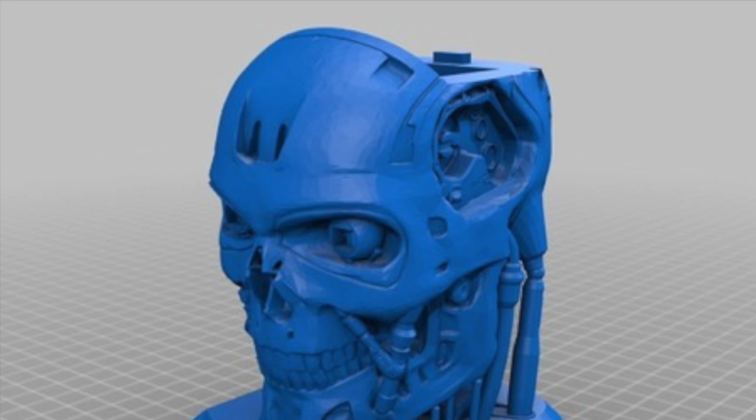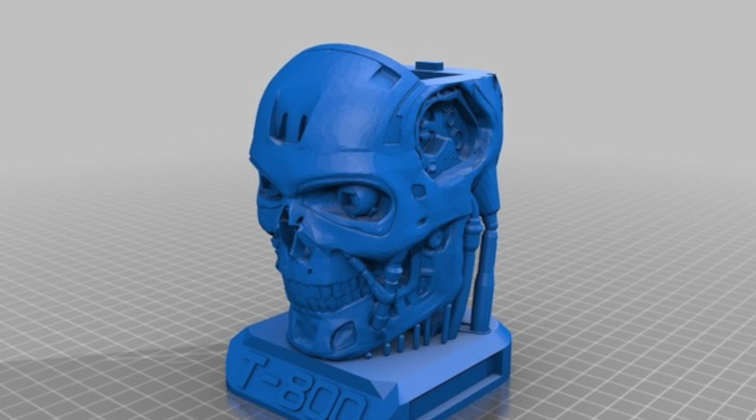So for this model, I made 3 different files. One was the main base portion of the Terminator head that had a cavity cut out of the inside of it to house the battery pack, and also it had channels cut out to occupy the electrical circuit. Second file is just a cap that is going to be used as an access panel into the battery compartment. Third file is the electrical circuit itself, nothing else except for the conductive bits.

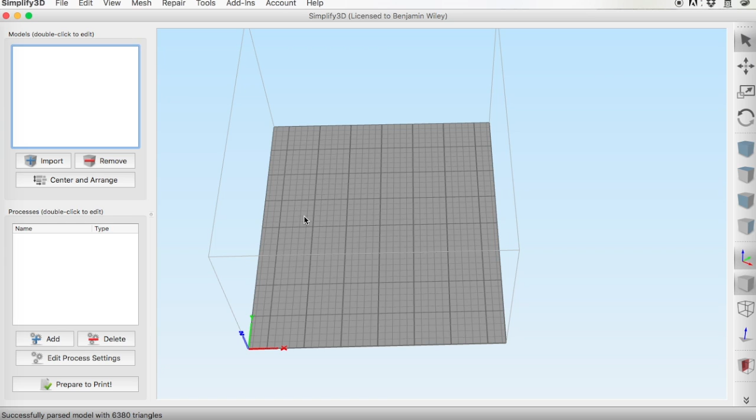I've included various file formats, STLs, AMFs, for all these models, but the easiest way by far is using a Simplify3D factory file that I've included that has everything already compiled in it with print settings included. So go ahead and open up that factory file, and you'll see all the models load onto the build platform.

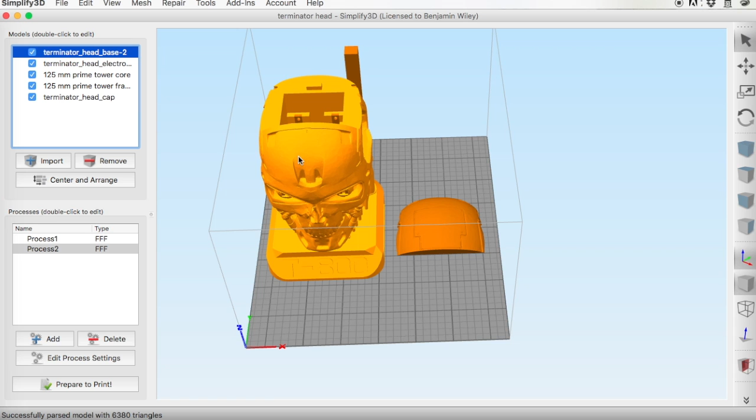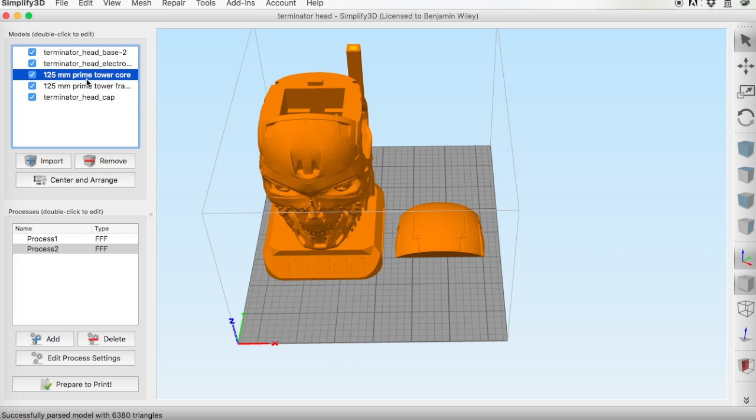On the right here you will see the cap model. It's going to be printed out of black PLA, process 1. And on the left you'll see the main base portion of the head, also printed out of black PLA. And as a separate process, different material, you see the electrical circuit here. It's going to be printed out of the Electrifi. Also, you will see the custom prime tower that I made that has an Electrifi core and a PLA shell. The PLA shell just provides a little extra structural support.

The last thing you want to do is check your starting script. There's an M302 G-code command that you have to include. I'm printing Electrifi filament at 150 degrees Celsius, which is lower than most firmwares will allow you to print. It starts to assume that there's a problem with your heater and will not allow the extruder to turn below a certain temperature. The M302 command will override this safety feature and allow you to extrude at any temperature.

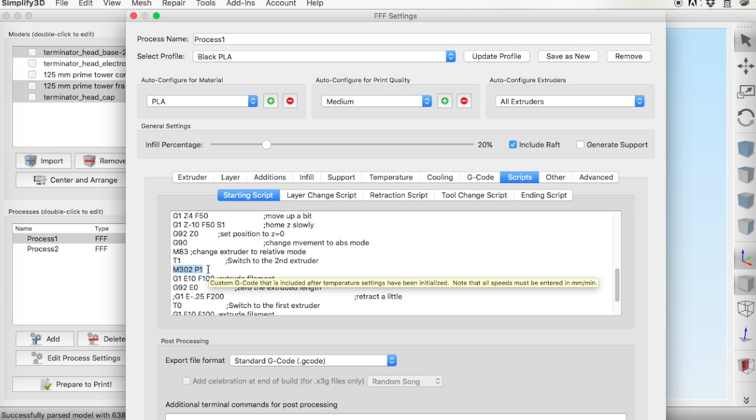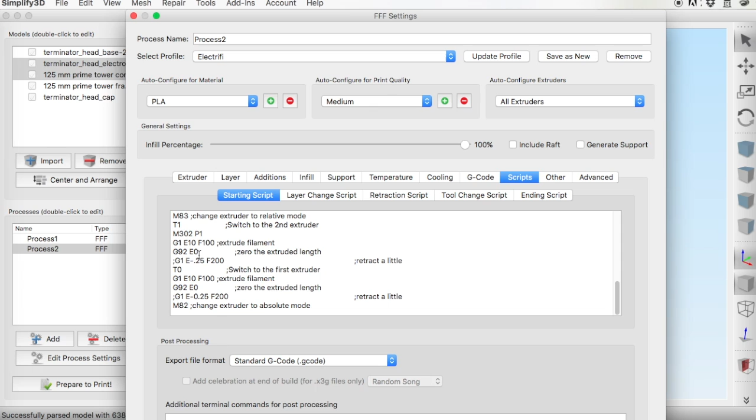I'm running RepRap firmware. This is the proper syntax for that firmware, M302 P1. If you are running Marlin firmware, for instance, it would be slightly different. It would be M302 S0. So double check your firmware and check the correct syntax that you'll need to use for the M302 commands. And you also want to go to process 2 as well and make corrections if necessary to the syntax of that M302 command.

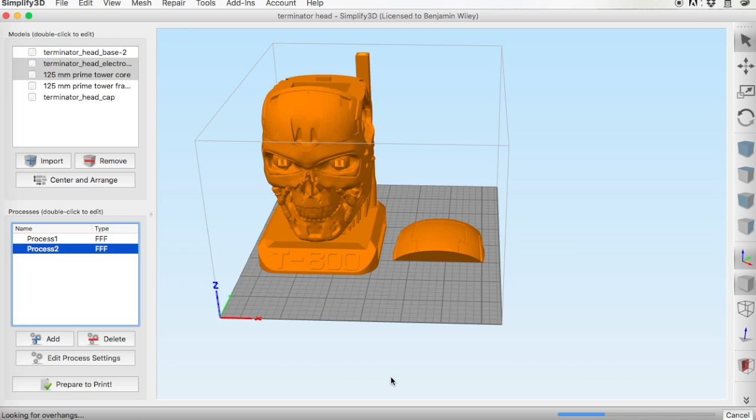Alright, now let's go ahead and prepare our prints. Hit select all to select both the black PLA and the Electrifi processes. Click OK, and now we have to wait a few seconds for the slicing software to finish slicing the model. And when that finishes slicing, you'll be able to see the results. The blue is going to be printed with tool 0. That's where you want to have your black PLA filament loaded into your first nozzle. And the green is tool 1, which is where you need to load your Electrifi filament.

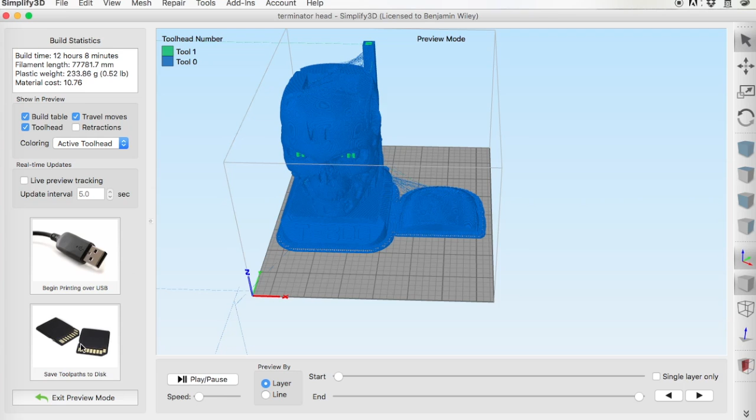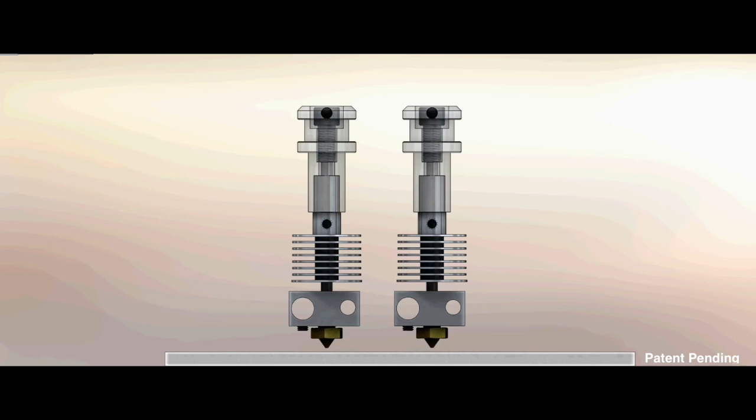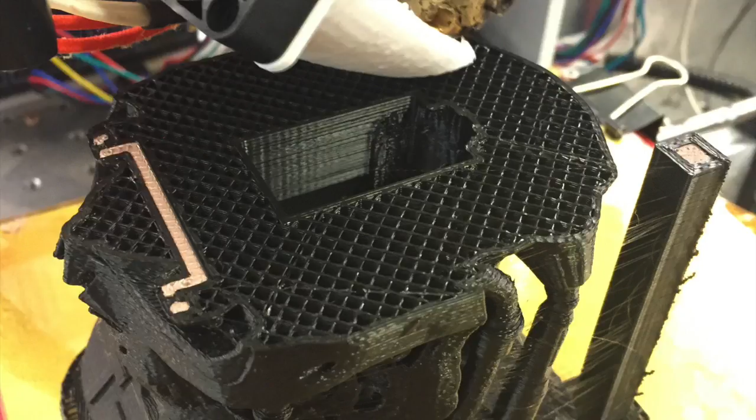Okay, so now we can go ahead and save our G-code file to our SD card and upload it to our 3D printer. Now I highly recommend switching out your hot ends for E3D's AutoLift all-metal hot ends when printing these embedded electrical circuits. Their mechanical retraction technology eliminates any headaches that you may experience with cross-contamination when printing 2-material prints. And if you're printing an electrical circuit and you have cross-contamination issues, it's going to lead to shorts.

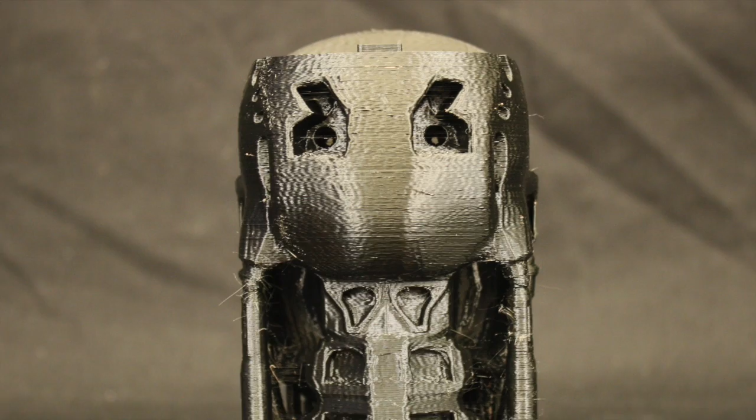Okay, so after you finish printing your model, it should look like this. So now we can go ahead and begin assembling everything. You'll find 2 holes in the back side of your model where you can insert the bolts that are going to go into your screw terminals. So go ahead and insert those bolts and then fasten your JST connectors with your nuts and washers in the orientation shown here, with the red wire on the left and the black on the right.

And then we're going to go ahead and move on to putting in the LEDs. A solder reflow station is really handy for this. A hairdryer will work in a pinch, but a solder reflow station is much easier to control. Alright, so we're going to go ahead and heat up the Electrifi contacts. Just hold it close to the contacts for about 10 seconds or so. And then you can use a pair of tweezers to press the LEDs into the Electrifi. So after you finish doing that to both eyes, it should look like this.

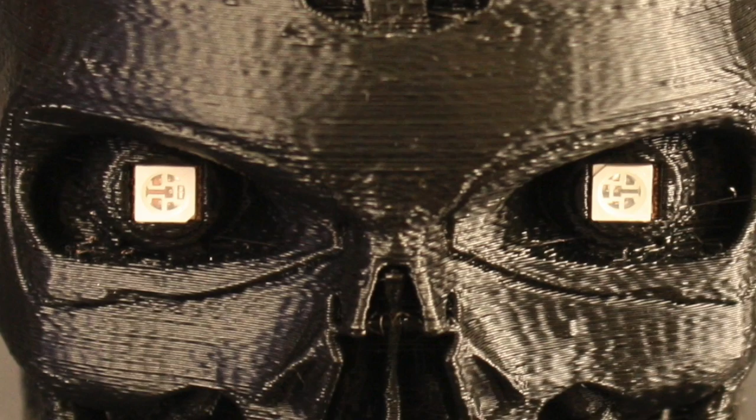Make sure that you put the diagonal slots that are cut out of the corners of the LEDs facing inwards towards the nose. And you want to go ahead and wait for it to cool down, give it 5 to 10 minutes. And then you can go ahead and connect your battery. Then check to make sure your LEDs both light up.

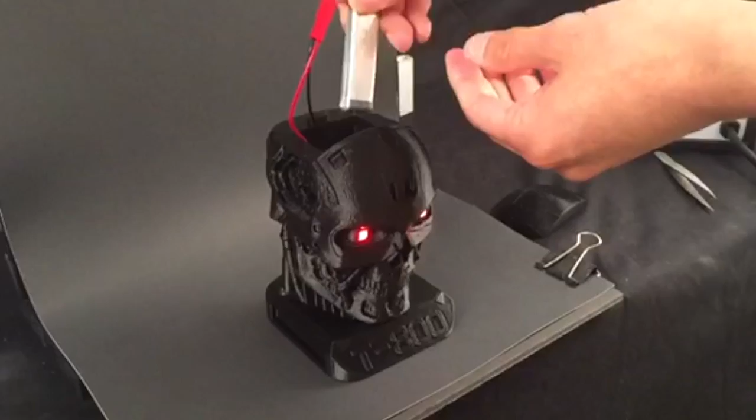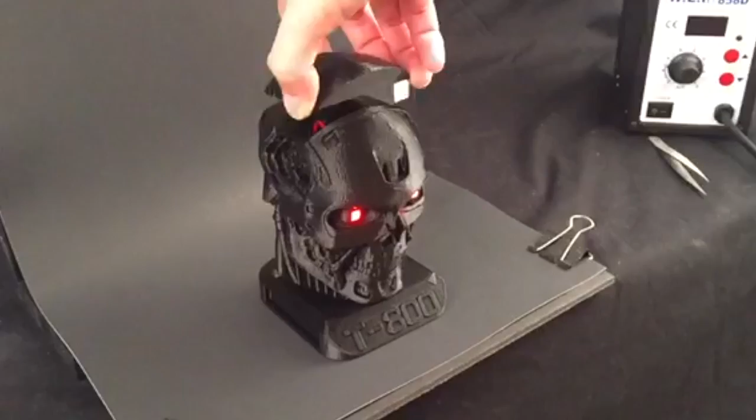If they don't light up, you may need to heat it up a little bit and then press a little harder. Maybe you didn't make a very good contact with the Electrifi. Or you may have put the LEDs on backwards, so you might want to just reheat the area a little bit and carefully pull off the LED, switch it around, and then repeat the process.

And that's it. So congratulations, we just made the Terminator with the embedded electrical circuit, 3D printed with Electrifi filament. Stick it on the mantle, wherever you like, impress your friends.